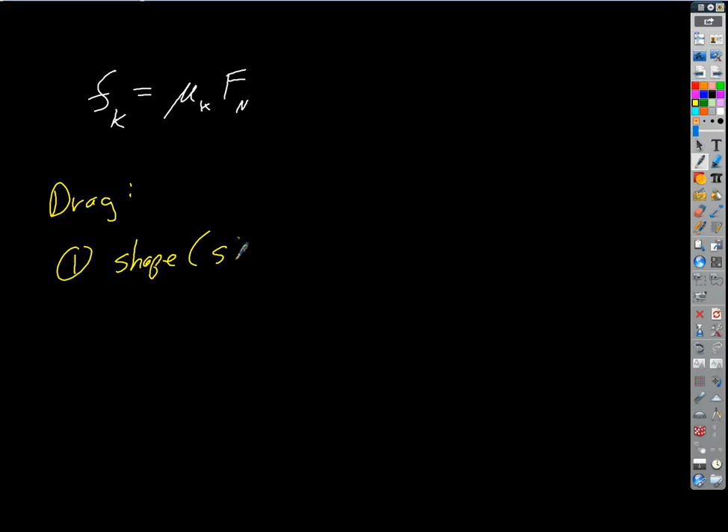Okay, so let's see if we can get this though. So if we're trying to do drag, let's see if we can kind of build our equation here. Drag is going to depend on, we said, shape, right? Streamline versus blunt. What else? You said area, right? Cross-sectional area. So the area that's actually seeing the fluid that it's traveling through, right?

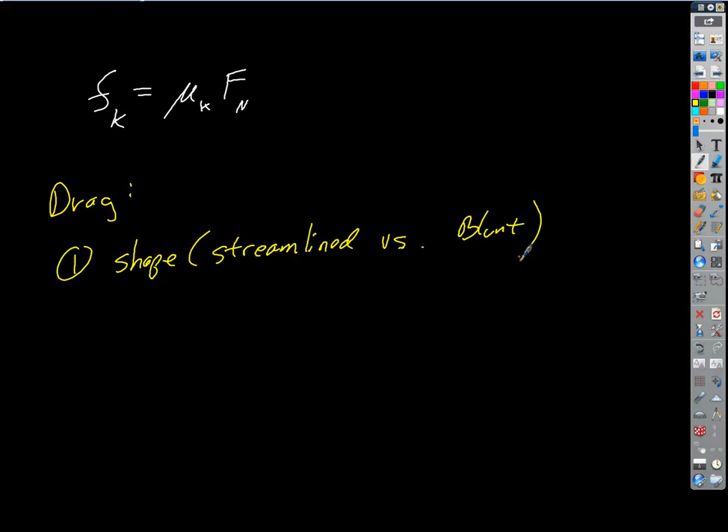For example, if I were to take this meter stick and I threw it like this, and I compared that to just a little chunk of wood that had the same cross-sectional area, is the extra length going to really affect the aerodynamics much? No, it actually makes it better, honestly. It makes it better, not worse. So really all we're concerned about is just that little bit that you're seeing coming at you, that's cutting through the wind. That's the cross-sectional area.

So that's the part, you can think about it as the part facing the fluid. Okay, what else? What are some other dramatic examples of where drag would be increased? Like when you dive off of the high dive at the pool, how many fluids are you traveling through? Two. What are they? Water and air. Water and air. Okay, which one obviously has a much higher drag? Water. Yeah, the drag force of the water is much bigger.

How come? Because there's more molecules. More molecules per. Okay, there's more molecules per, so what's that probably? Parts per million. Okay, you guys are flirting with it here. What's the... Volume. Well, what is it? Density. There we go. Yeah, density. Good. The density of the fluid is going to make a difference. And if we want to get a really sophisticated model, there's some other things going on too. Viscosity would be another issue.

But usually, we've got to make a distinction. What's the rule called? Somebody's law. I can't remember off the top of my head what it is. But you kind of divide drag into two camps, and there's a gray area in between. If you've got a relatively dense object moving through a fluid that's not very dense, then we call that drag. But if you have a relatively light or small particle traveling through a viscous or dense fluid, then it acts completely differently. What we're going to come up with here doesn't apply at all. It's totally different.

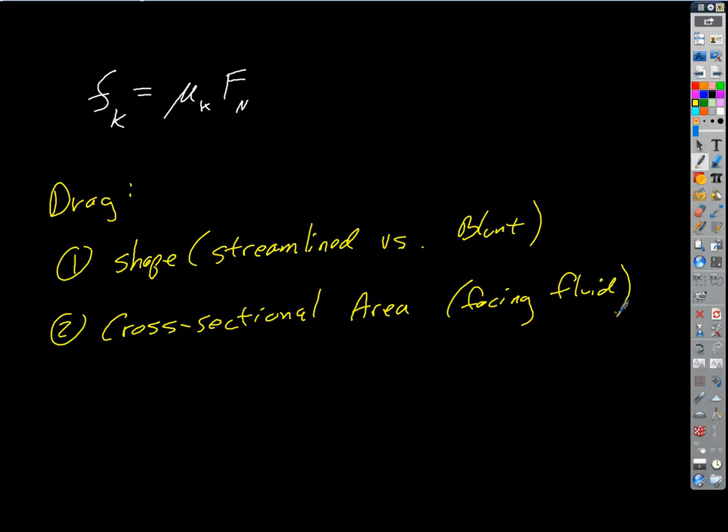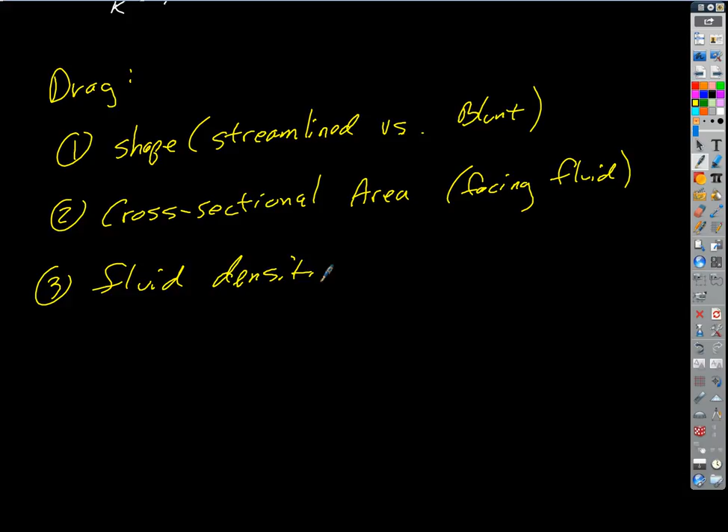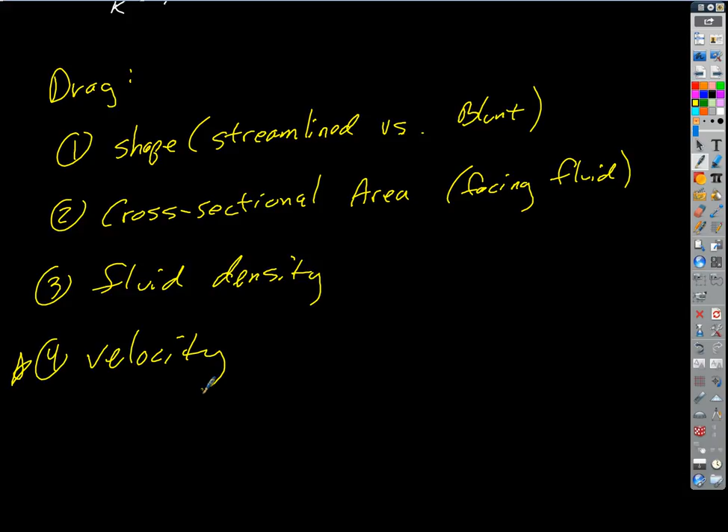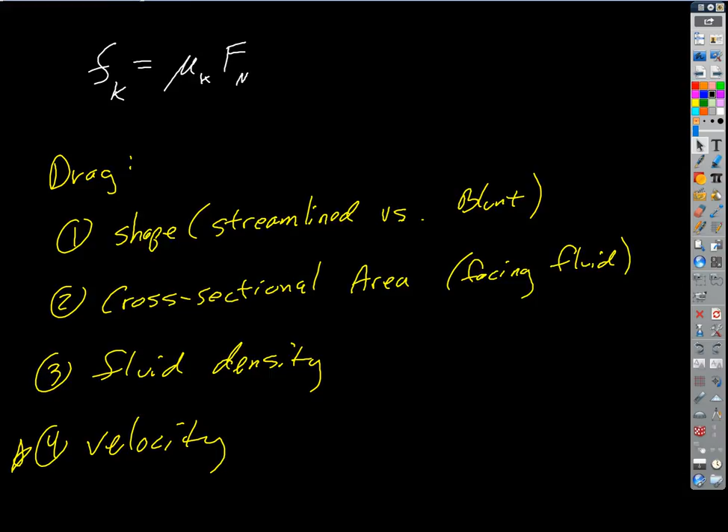But if you ever watch a cat in slow motion when they're falling, they'll spin their tails. Yeah, they're very flexible, but they'll spin their tails too. So they're doing some good physics when they do that. And we'll get there eventually. Cats are the real physicists. No, go back. Go back, sure. Actually, everything that's on there is going to be better on the next page anyway. Okay, so

then we've got drag force. We already told me that drag force is proportional to velocity. It turns out it's proportional to velocity squared. So try this, little everyday physics. Try this sometime when you have access to freeway and surface streets. Try putting your hand out the window of the car when someone else is driving. It'd be better if you could even have like a ping pong paddle. Hold that out the car.

Just try not to lose it. You're not gonna be able to hold on to it. Well, I mean, it wouldn't be that big a deal. But hold it while you're going 10 miles an hour, 20 miles an hour, 40 miles, no, not 100, 40 miles an hour, and maybe for short duration get up to 80, so we're gonna double it. I want you to see what happens with that.

When you double the speed, initially you're not gonna notice it as much because they're pretty small, but when you go from 10 to 20, it's not just linear. You're gonna notice that it actually increases as the square of the speed. So when you go from 20 to 40, and 40 to 80, by that point the forces are big enough that you can really tell. That's not linear. They're really getting pretty strong.

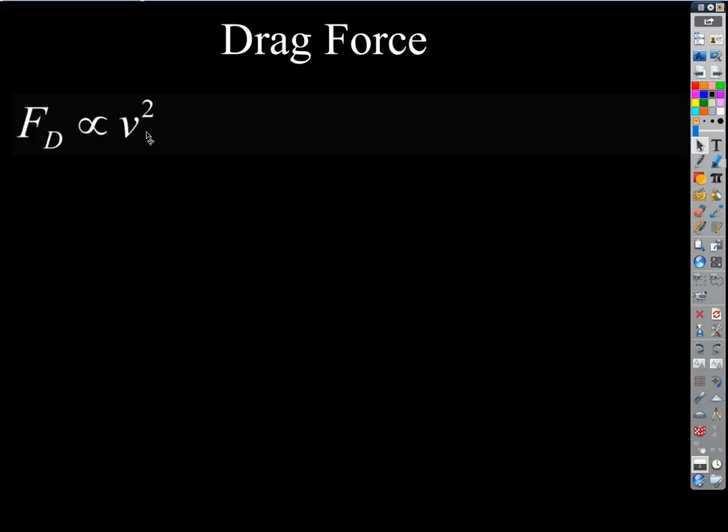Okay. So have you ever put pennies on your fingers? What do you do? You put little pennies on your fingers. Oh, and hold them out the window? Yeah. Oh, that's kind of cool. I never thought about that. Huh. Well, that's good. Paper. Eventually, yeah. Well, no, so when you slow down, they fall off though. Yeah. That's a good way to do it. I never thought of that.

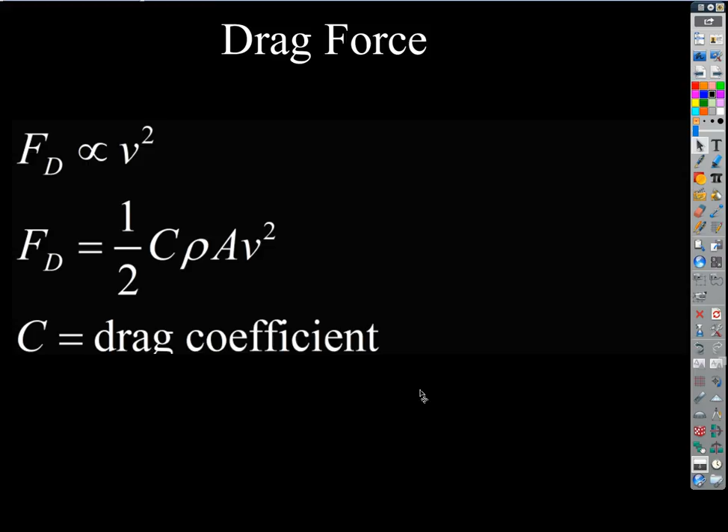That's going to be much like a coefficient of friction. It's something you're going to have to look up in a table. It's not something you're just going to know or be able to calculate. It's been measured in a wind tunnel, and there are lists that are published. And that's gonna be the shape. Yeah, it has to do with the shape, the texture and things like that. Then in addition we've got rho, which is the fluid density. So for air, that's going to be really small.

For water, that's going to be pretty large. Obviously, that's going to contribute linearly, right? So the bigger the fluid density, the greater the drag force. If I double the density, I double the drag force. Same thing with drag coefficient. And it's a coefficient, so that's going to be unitless, right? That's just a number, just like a coefficient of friction.

A is the cross-sectional area, so that's going to be the part facing the fluid. For example, let's say we were looking at a bullet going through the air. What's going to be the cross-sectional shape? Circle. Everybody agree? So if I were just to cut through that thing where it's impacting the air, that's going to be the cross-sectional area. But can you look at that in 3 dimensions?

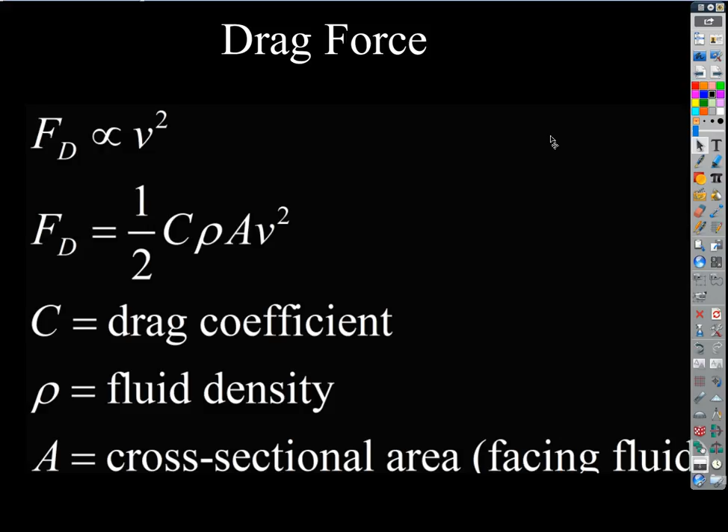Say that again? Wouldn't you look at that in 3 dimensions? I think you're saying something pretty good here. Say more. Articulate that a little more. I mean, if you looked at a bullet with a flat face, it would have... Right, that's what I thought you were saying. So if you look at the profile of the bullet now, not in cross-section, the bullet kind of looks like this, right? It's not just flat, it's actually got a taper at the end. Yeah. Right, you're right.

Is it truly the cross-sectional area? Well, not really. There's a lot of fudging going on with this. You're gonna have to say, where's the critical place where you're gonna measure it? And there's a whole bunch of physics we're not talking about. There's a lot of things that go into this. This is a much simpler version of what drag force would actually be if you're calculating it using calculus, differential equations or something.

And then there would be a Reynolds number, another kind of index that's built from the shape. How do you characterize the shape? Is it characterized as a truncated cone? Is it a bilaminate cone with a hemispherical end? All kinds of different shapes you can match this to. What's the length of the thing compared to the cross-sectional area? All of this goes into a more sophisticated model, which uses Reynolds numbers and Mach numbers, how many times the speed of sound you're going. But that's getting pretty sophisticated.

So we're just going to say there's some cross-sectional area which is essentially the front of this thing. But if it's cutting down to just a pinpoint, that's really not the cross-sectional area because it's flaring out. So somewhere along that taper we're going to say, that's the average radius, and that's going to be the cross-sectional area. So it's not cut and dried. You're right, we're fudging it a little bit with this simplified version. But honestly, it's what most people would use most of the time.

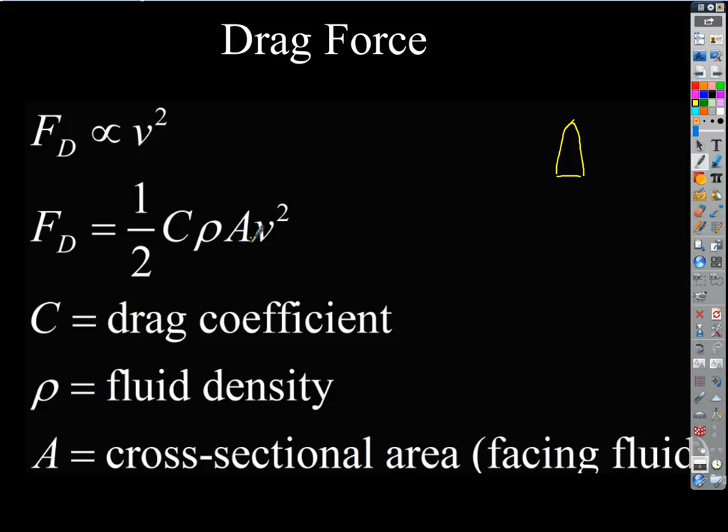Does the speed of sound change with fluid density? It does, yeah. Generally, the speed of sound goes up as the fluid gets denser, because the molecules are closer together. Yeah. So then what about cross-sectional area?

Okay, so that's it, right? There's a lot of different ways of determining drag coefficient, and I just pulled this out of a textbook somewhere. This just gives you a rough rule of thumb. It's not a hard, fast rule, but generally a sphere is going to have a drag coefficient about like that, plus or minus a little bit. Half sphere is going to be a little different. Cones are a little different. Oddly enough, spheres have less drag than cones do.

What's that? Which way is the air coming? It's coming in the direction of the arrows. Oh, okay. So a streamlined body like that, look at that. When you start to have something that's kind of a teardrop shape, look how low the coefficients get, right?

And so you'll notice that when you look at a lot of futuristic cars, when people are looking at cars of the future that are trying to really streamline stuff, a long time ago people used to think that, well, all you gotta do is make them pointy. Well, you really don't. You wanna make them more like this, right? You wanna make them more streamlined. And having what's called a ducktail on the end, like this, helps. It really does. It seems like it's just extra surface area, but if it's longer in the back and tapers, that actually improves the drag coefficient.

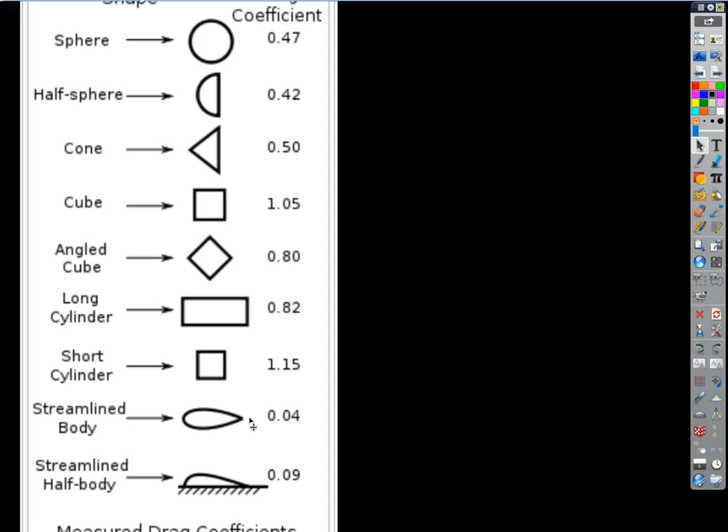Yeah. What's that little symbol thing up above? Let's see. The proportional to symbol. Oh, yeah, right there. Sorry, I forgot to say that. That's proportionality, right? And so this is generally true: drag force is roughly proportional to v squared, but if we want to come up with the actual equation, then we have to include all this other information, all these other factors.

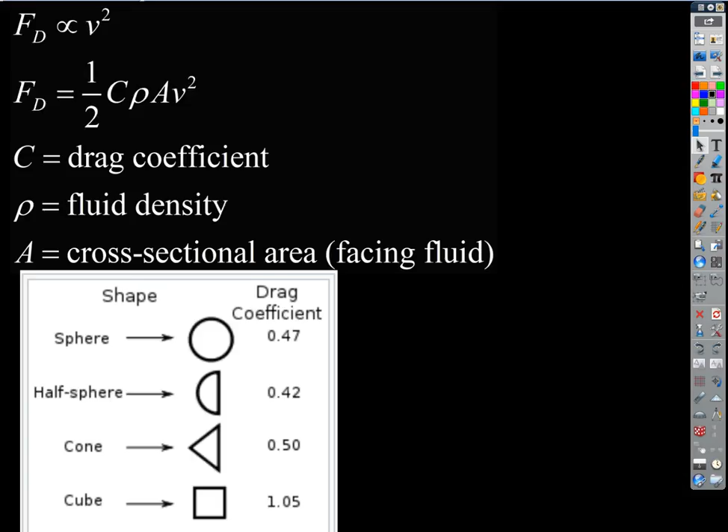Where can you find those? Oh, just on Google. If you just Google the cars with the lowest drag coefficients, you're going to find a lot of pretty sporty cars. Although sometimes cars like Testarossas are actually going to have a little bit higher drag coefficients because they've got spoilers. So there's two things going on. They're trying to cut through the wind, but they're also trying to increase their surface-to-surface friction by increasing the normal force. So they'll sometimes have spoilers and little foils that push the car down. It actually hurts the drag coefficient a little bit.

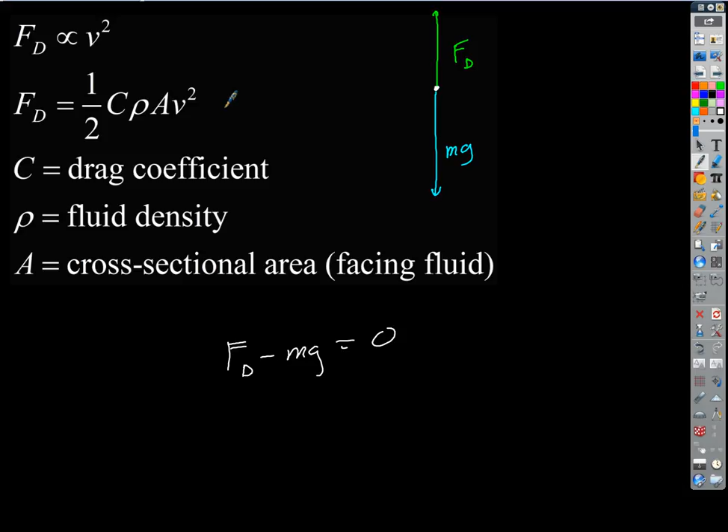So this is a pretty simple equation, right? Equation of motion here vertically is just drag force minus mg equals zero. So if we want an equation for terminal velocity, if we add mg to this side, we know drag force would equal the weight at terminal velocity. So our equation is just going to be this, right? Okay, so all we got to do is solve for v, and that's going to be our terminal velocity when drag force equals weight.

We're going to multiply both sides by 2. We'll solve for v squared first. Multiply both sides by 2, so we get a 2 on the top, and everything else just gets divided to the bottom. And then to solve for v, I would just square root it. So there is a formula for terminal velocity. Okay, what's it depend on?

Now notice this time mass is included also. So being more massive, is that going to help or hurt you if you're trying to go faster? It's going to help you. And things that slow you down: if your drag coefficient increases, that lowers your terminal velocity because it's on the bottom of the fraction. If the density of the fluid gets bigger, that slows you down. Or if your cross-sectional area gets bigger. That all makes sense. So let's do a little calculation here.

Let's say I'm going skydiving and I'm going to fall horizontally. What's my surface area? Be kind. Say 2 meters by, I don't know, probably half a meter if you're wearing clothes that go down your legs. Is that pretty kind? That's half a meter, right about there. On average that's close enough, because I'm not quite 2 meters tall either. So my area, 2 meters by half a meter, is 1 square meter. Close enough.

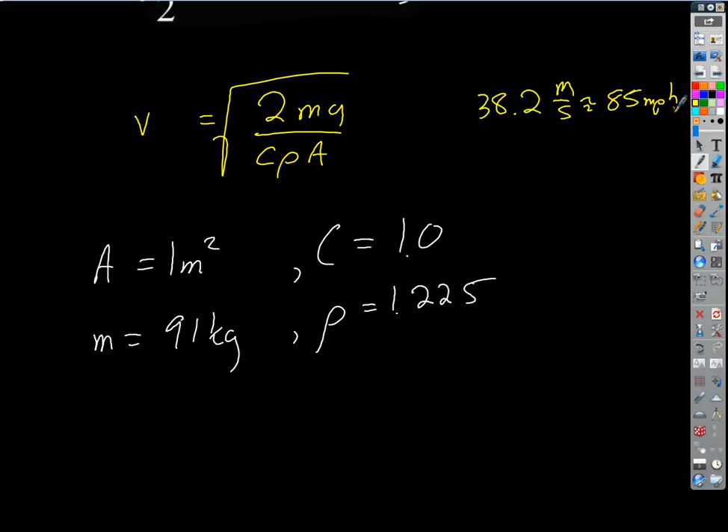Now there's only one change we have to make if we want to compare that to feet first. So in that same calculation, we're just gonna change the C to a 0.7. What do we get? Was the last one supposed to be when we were horizontal? Yeah, that's horizontal. So that's how fast you hit the ground? Yeah. If you're horizontal.

45.6. I always thought you could survive. 0.607. Okay, so what's that? I got the same answer. What'd you get? 45.6. Okay, so what is that in miles per hour? 102. 102? Okay. It's really fast.

So what's your strategy then? If you're ever in the unfortunate situation to be falling out of a plane without a parachute, what do you want to do? Go horizontal. Increase your area. You'd want to fan out your coat as much as you could. You'd want to fall for as long as you could horizontally, and then at the very end, you'd want to try to rotate and go vertically. Yeah, that's what you'd want to do, right as you're getting down there, to maximize your chances of survival.